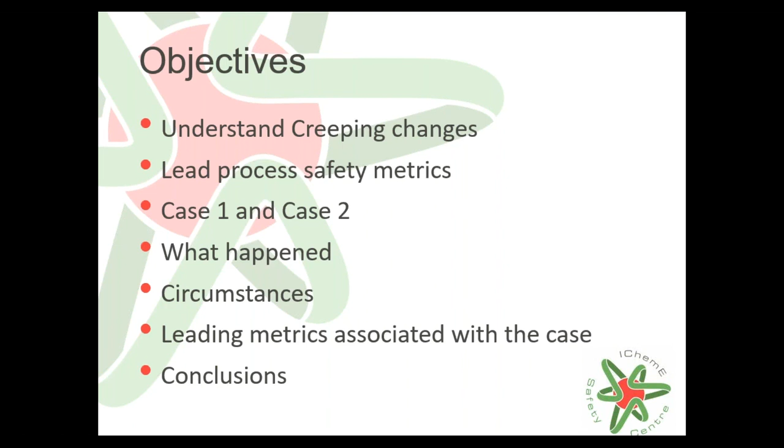Then I will go into the details of what happened, what were the circumstances, underlying causes, or contributing factors to that particular accident, and then I will associate those lead metrics as far as I can with those cases, and we will move to the conclusions. I think most of you who have heard me talking before know I like starting my presentation and building it up based on past events, because I truly believe that sharing old stories and old cases is really important to get to know more about the phenomena we'd like to explore.

Now, about creeping changes, I have a couple of examples, and very briefly I would like to present why I think these are related to the topic. The first one is the case of the Royal Air Force Nimrod military aircraft that suffered a catastrophic mid-air fire whilst on a routine mission over Afghanistan in 2006. This led to the total loss of the aircraft and, unfortunately, the death of all 14 service personnel on board. The direct cause was not enemy fire, but leaking fuel being ignited, apparently by an exposed hot cross-feed pipe.

Now, the deeper causes were quite organizational and managerial. For instance, between 1983 and 2006 — quite a lot of time — a fourfold increase in the number of fuel leaks on this aircraft occurred. That escalation happened gradually over these 23 years. These leaks, individually, were not considered safety critical, one by one. They just thought it was a one-off case, and that's it. They didn't consider them all together as a chain of events.

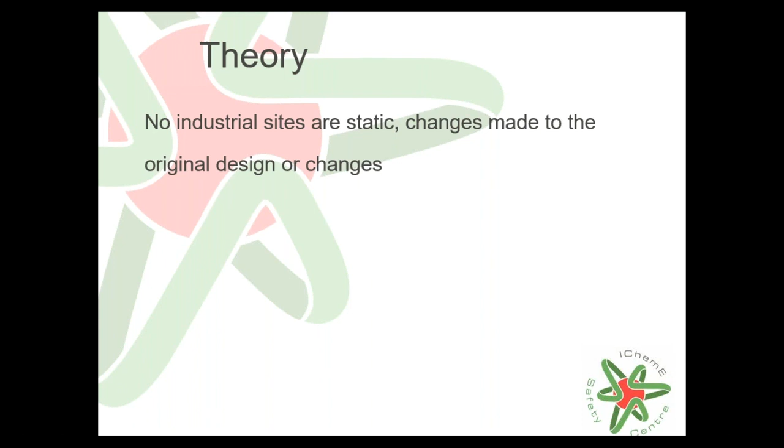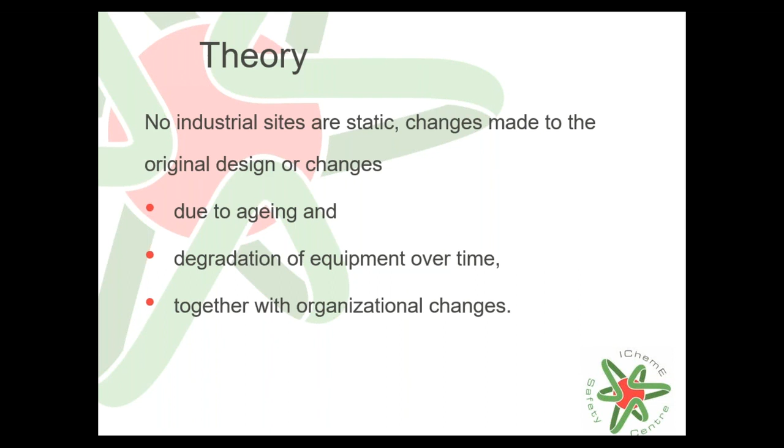Partially because no industrial sites are static. We may tend to forget this, that changes are normal. Changes made to the original design, or changes due to aging. For instance, changes inevitably occurring during degradation of the equipment over time. And there are, as you already mentioned it really nicely, organizational changes that occur in the facility. Plus the category of normalization of deviance - accepting deviations from the norm, either not following the operating procedures or accepting a new behavior as the new norm. So this is the theory behind it.

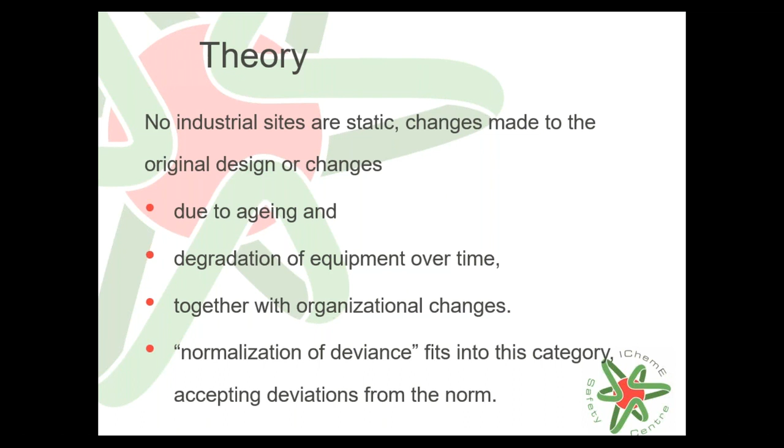But what are the main aspects, the main features of creeping changes? Obviously, everybody can add to this list if you wish. I give you a couple of examples just to trigger potential thoughts. Now, the main aspects, I think, are physical degradation, physical changes in the plant and the equipment, as I already mentioned, organizational changes. A very significant aspect is altering from the original design, new or modified processes introduced into the system. Relating to aging, for instance, that is also an aspect we have to consider - loss of skills and knowledge brought about by staff changes and changes in the culture within the company.

But then, if we know the main characteristics, I have a question. Why is it so difficult to identify these creeping changes? Because I think these changes remain unchecked because, as you already pointed out, they are small, unplanned, gradual, and therefore they may not be noticed or they may be ignored, and they can lead to normalization of deviance. Not all of them, not necessarily, but it can happen.

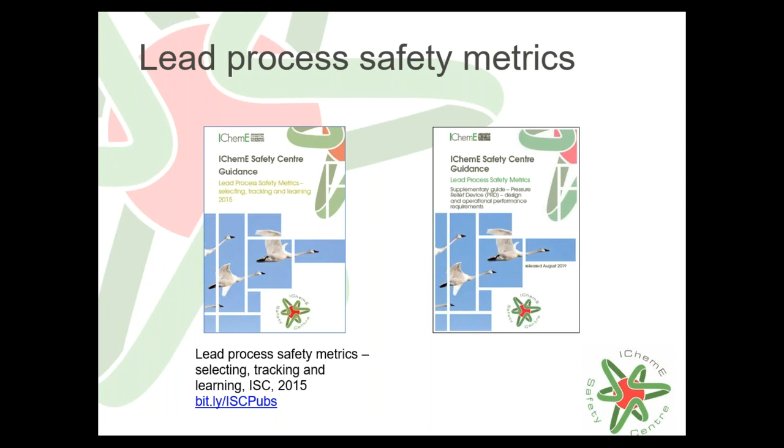I will show you later on how these metrics could be linked to the key findings about those cases, and you will see there is a link so that you can download at any time these guidance documents, both of them, from our website. We have 21 lead process safety metric elements, and these are grouped around the 6 pillars or 6 elements of the IChemE Safety Centre framework. I don't want to spend much time on this, but you will see the importance of these metrics in terms of creeping changes during the presentation.

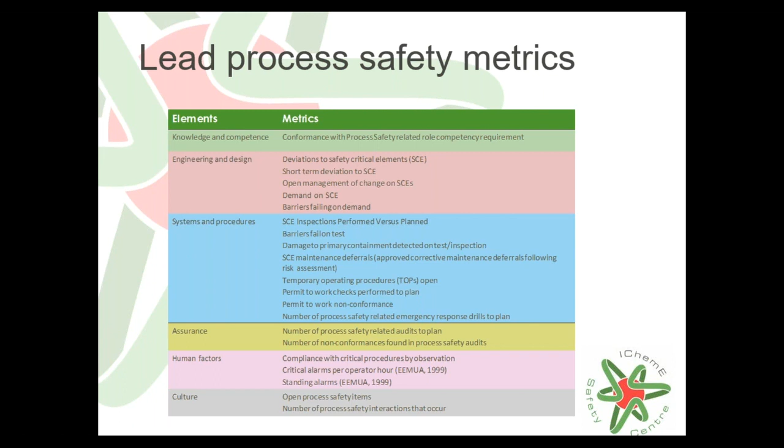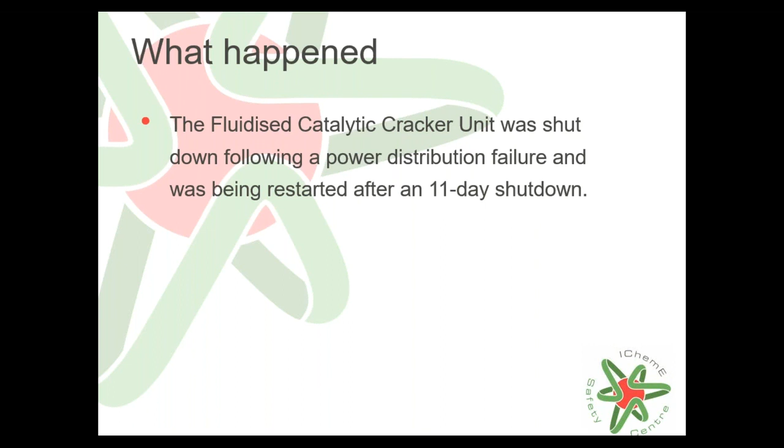Now, the first case occurred in an oil refinery, and I will tell you what happened exactly. The fluidized catalytic cracker unit was shut down after a power distribution failure at the end of May, and was being restarted after an 11-day shutdown in June. During startup, however, a significant leak of hydrocarbons was discovered by the staff, a vapor cloud formed and then ignited, resulting in a serious fire. Luckily, all the workers escaped before the blast happened, and nobody got injured in this incident. So that is the positive side of what happened.

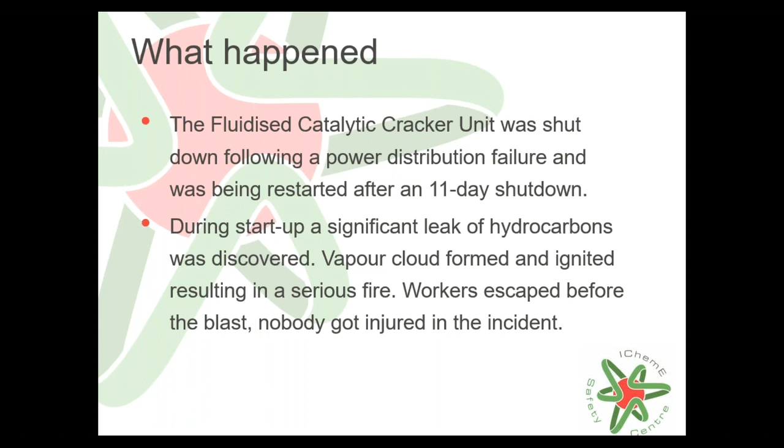But let's see about the circumstances. You will see some of the words underlined, and you may have a slight idea why I indicated them underlined, but I will tell you later. Now, the leak was apparently a result of the failure of a T-piece connection at the base of the debutanizer column, and it found a source of ignition nearby.

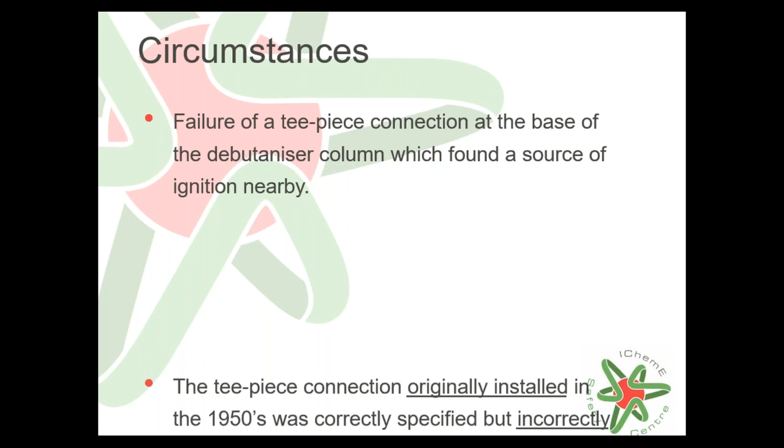This T-piece connection was originally installed in the 1950s. So this is an interesting aspect. If you think about creeping changes, most of the investigation reports don't go back in time that far. However, creeping changes could have originated years and years before the actual big accident occurred. So in this case, this T-piece connection was originally installed in the 1950s. It was correctly specified, however it was incorrectly fitted, and eventually it was hidden by lagging. Plus, there was no subsequent amendment to the plant layout drawings to identify that change.

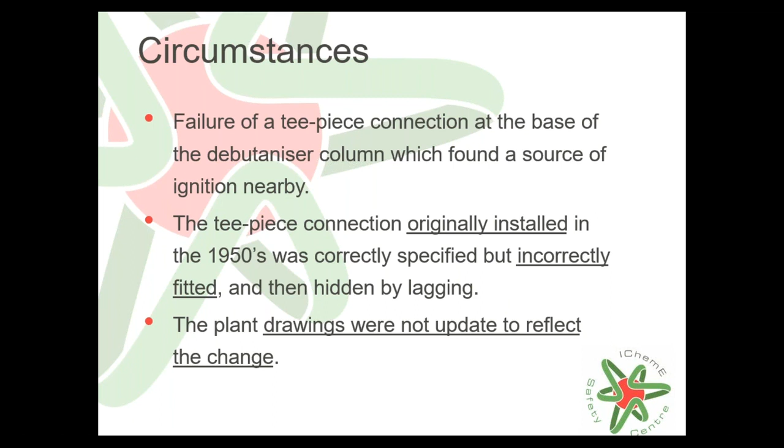And then you can ask me the question, but then how can I know that there was a change? How do I know that there was the lagging, and that you don't have any information on how the T-piece connection was fitted? As I promised, I'll tell you why I underlined these aspects in the circumstances, because those are, I think, elements of creeping changes already. So there was an original installation, but incorrectly fitted and then hidden by lagging. I could have underlined also the lagging factor, and the fact that the drawings were not updated.

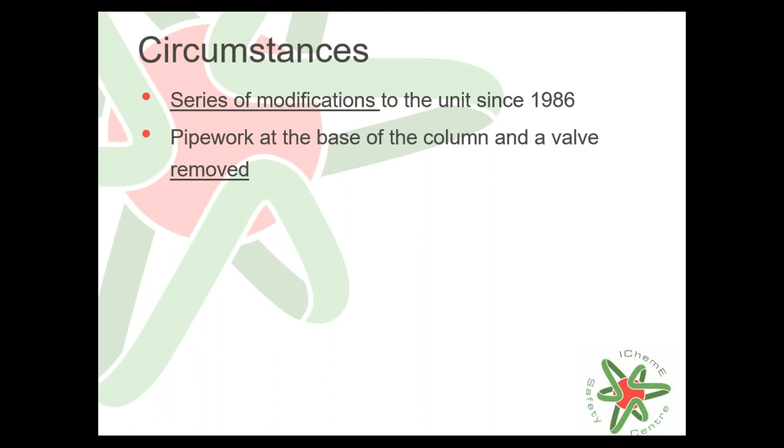What were the others? Since 1986, sections of the unit had been significantly modified, and prior to these modifications in 1986, changes had been made to the pipework at the base of the column, and there was a valve. The valve was removed. That was also an underlying aspect here. That change particularly resulted in inadequate support for the remaining pipework and the T-piece connection.

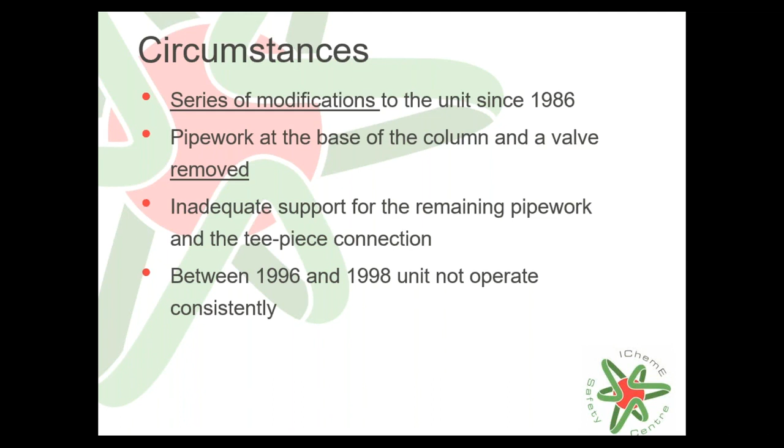Between 1996 and 98, the unit had been experiencing considerable difficulties, and apparently it didn't operate consistently. So for 2 years, there were problems with the operation, and this resulted in an increasing number of startups and shutdown cycles. That could have contributed to subsequent incidents due to cyclic stresses and vibration, as we know, because of the increasing number of startups and shutdowns, which are really dangerous procedures in terms of running parameters being really high, like high temperature and high pressure, so that degradation of equipment could occur during startup, especially rapidly.

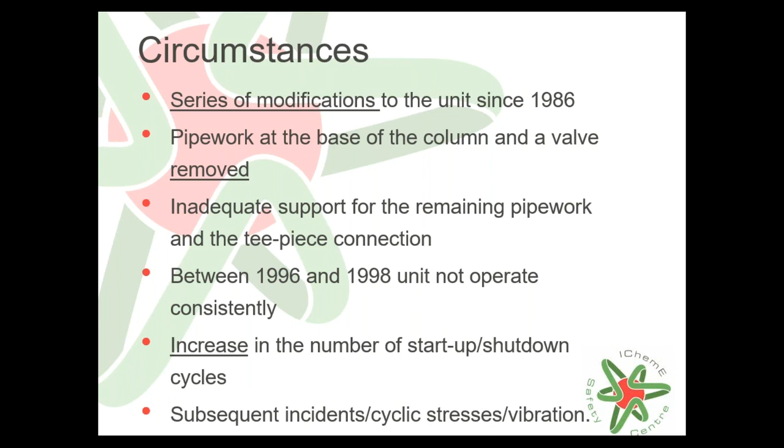I have underlined a couple of examples here as well about the series of modifications. The valve was removed, and then the increasing number of the startup and shutdown cycles. Now, what else happened here?

11 weeks before the incident, out of 19 startup attempts, only 7 were successful. Failure of the T-piece connection pipework was probably caused by a combination of the incorrectly fitted T-piece connection and the inadequately supported pipework. There was also a problem with the safety report, because it didn't reflect the current condition of the unit.

There were incidents before, as we could see in the previous examples of past events, showing a pattern of previous incidents related to vibration of the transfer line, even two years before the explosion. Those incidents apparently were not reported and not investigated.

To make our life a little more difficult, there was another contributing factor to this chain of events: construction on site of a new facility, with most of the work subcontracted out through a contractor of the contractor of the contractor. So there were different layers of contracting out the activity, which wouldn't necessarily be a problem, because this is what operators and plants normally do—you need to contract some work out.

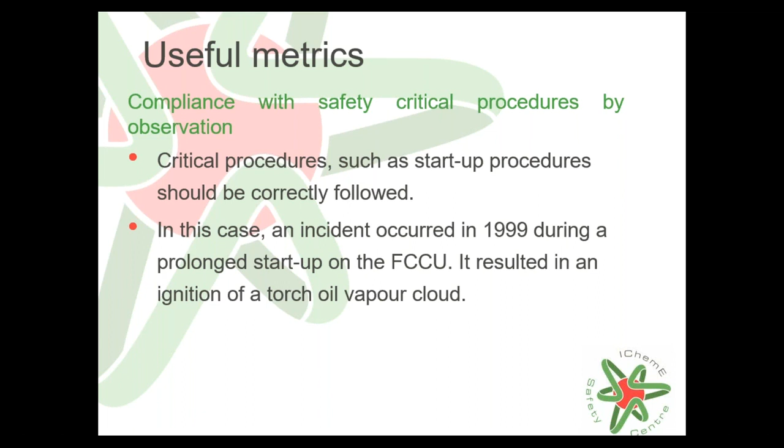Many previous incidents occurred, and there was a prolonged startup on the unit that resulted in the ignition of a torch oil vapor cloud. Why is this important? Because the operating procedures, which were really solid and in place at this plant, were not correctly followed.

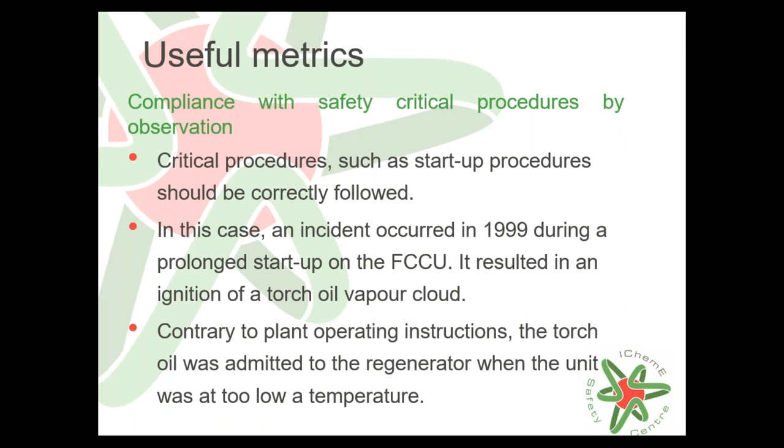Another potential metric could be the open management of change on safety critical elements, underlining the modifications that occurred to the plant over the years—particularly when they removed the valve on the pipework at the base of the column, which originally had supported the pipework and the T-piece connection.

That caused vibration and degradation of the equipment. Another potential lead process safety metric could be the number of non-conformances found in process safety audits.

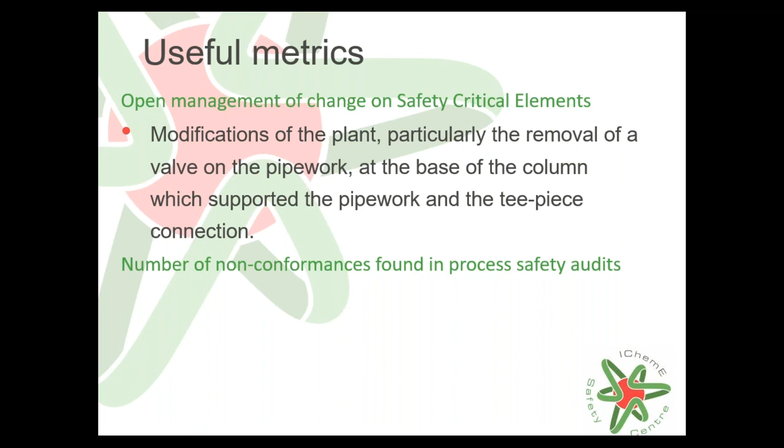As I mentioned, according to the authorities and regulators, the safety report didn't reflect the reality of the condition of the unit, because one or two years prior to the accident, the company's revision concluded that the hardware and software controls in place on the unit were adequate to prevent the occurrence of a major accident.

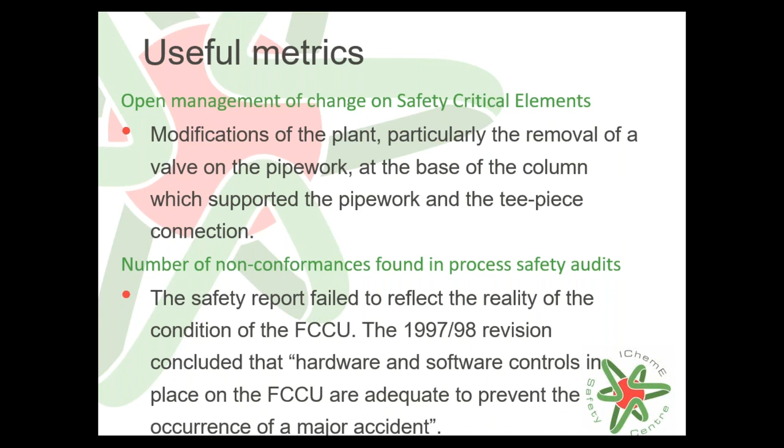So potentially, unfortunately, that was not the case. And there are a couple of metrics you can identify relating to culture, as I mentioned—different incidents occurred prior to the explosion and were not investigated or reported.

Those eventually resulted in organizational changes that went unnoticed. One feature of creeping changes is that there's ignorance—they didn't even realize such events had occurred in the past, so they went unnoticed and were therefore not investigated.

Then the company reviewed the unit once they knew there was a problem, trying to find out what happened and why it didn't operate properly. But unfortunately, those findings were apparently not implemented or communicated properly.

That was case 1 I wanted to present. As I mentioned, the second case will not be related to process safety, and it's a little more difficult to identify those creeping changes. However, it is not impossible.

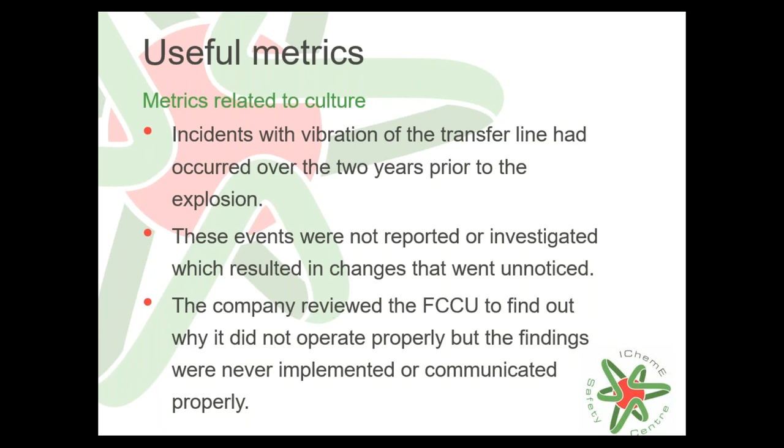I hope that case 1 already demonstrated some of the features and made it a bit clearer what we mean by creeping changes. Yes, you may say it's easier to recognize those changes after the accident happened and after the investigation report is out. I agree, however we can still learn from these points, so that in your own operation you may think about whether you have this kind of change in your plant. That could help prevent such events, or at least some of them. So they can be useful.

I guess many of you are familiar with the case of the Herald of Free Enterprise. This ship was a ro-ro, roll-on roll-off ferry, and this is the case I will show you now, trying to associate the aspects with creeping changes. So what happened?

The Herald of Free Enterprise took the lives of 193 people when it sank off the port of Zeebrugge, Belgium, in 1987. The ferry was leaving the harbor for Dover when water entered the hold and car decks via the open bow door. The Herald of Free Enterprise passed the port at 6:24 p.m. and capsized approximately 4 minutes later. Even though the ferry didn't sink entirely, as it was in shallow water above a sandbank, there was not enough time for passengers and crew to escape, and that's why there was a high death toll.

The bow door, which was left open, was used for loading vehicles. Most ships had divided hulls, but ro-ro ferries tended not to, because of the difficulties of loading cargo and the desire to maximize loads. This particular ferry didn't have bulkheads, which was actually a normal practice on ro-ro ferries at the time. So when water entered the ship, it moved to one side of the deck and the ship became unstable.

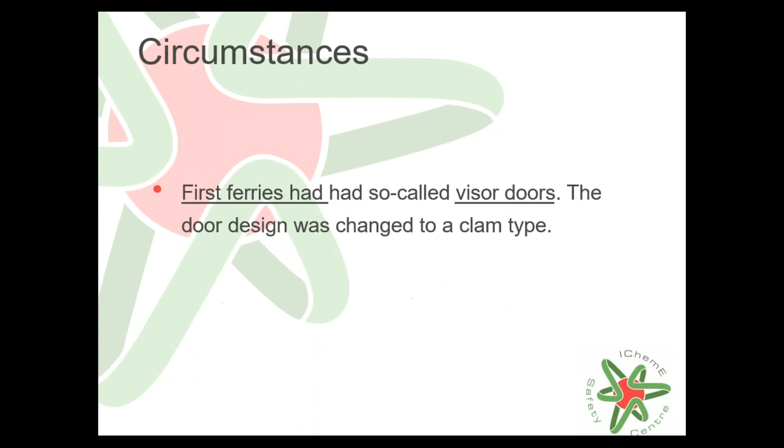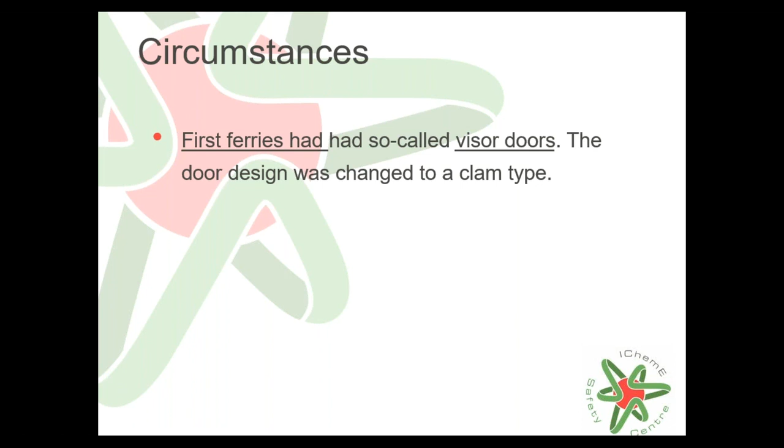The bow doors on this ferry were not visible from the bridge, so the captain couldn't see whether the doors were open or closed. The first ferries, however, had different types of doors called visor doors, which allowed the captain to see the status of those doors from the bridge. But there was a design change where they changed those visor doors to clam type doors, and eventually that resulted in the doors not being visible from the bridge anymore.

Again, the pattern of sailing with open loading doors had occurred previously to this accident. It was a known phenomenon, and from the investigations, captains kept asking management to install indicator lights so they could see if the doors were open or closed. But apparently their requests had been ignored by the management.

Other circumstances included a recent change in ownership. A new company had bought the company just a few months before the accident occurred. Another aspect was that these ships tended to carry excessive numbers of passengers, even 10 to 20% more than the loading limit.

So more passengers were carried than they had life-saving equipment supplied on the ship. There was another interesting aspect, in my opinion, that there were 3 crews and 5 sets of officers on the ship, but they were always different people appointed to do the job based on a random decision, so they were just on the ship for that particular shift. Therefore there was no consistency in the duties - again, ownership, again, leadership of different

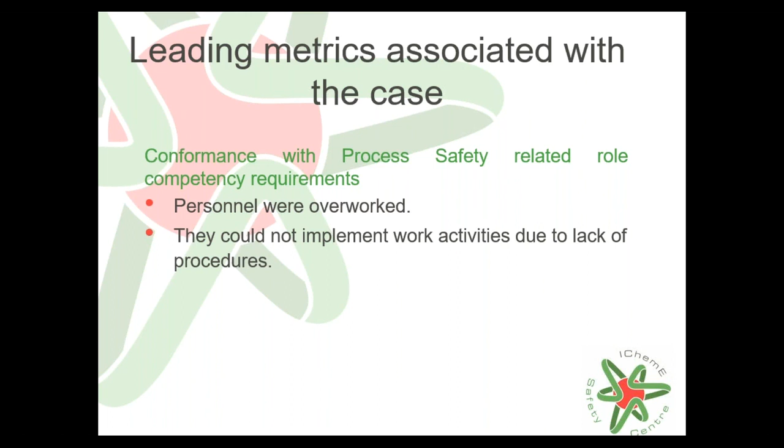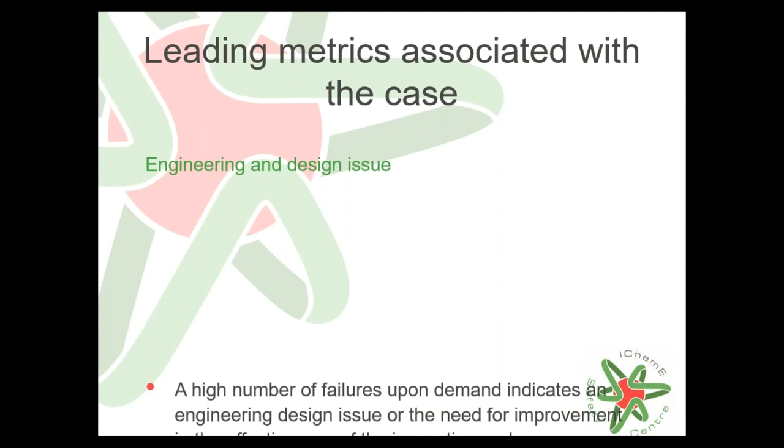What else? If we're talking about engineering and design issues, a high number of failures upon demand indicates a design issue and need for improvement. That is what the metrics say - the metric says.

In this case, the lack of divided hulls is a lack of barrier in place, or was a problem with the design. And as I mentioned, not following through on a change in the design with the divided hulls because of lobbying that expelled it - that was also a problem. That was also a change in the design, as well as obviously the visor doors that were replaced by the clam type doors, and apparently there was no assessment behind it.

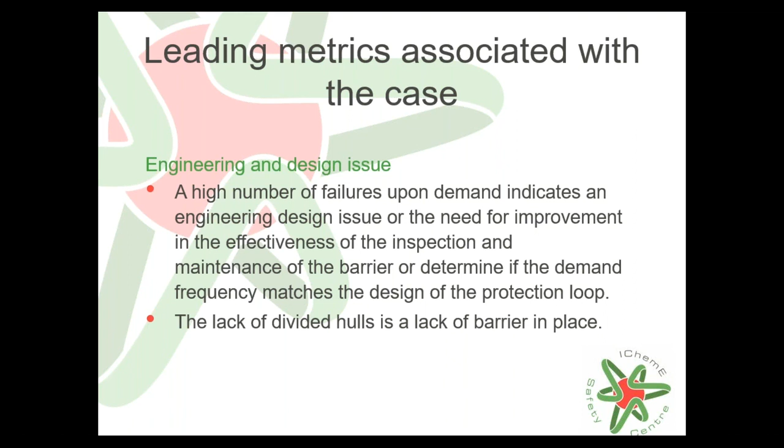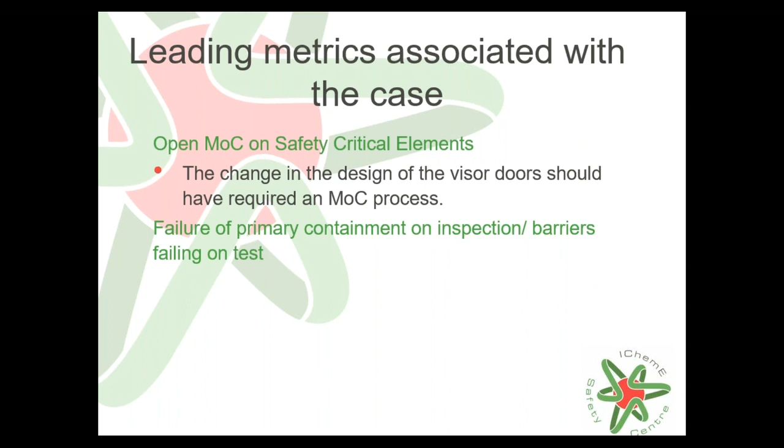Open management of change on safety critical elements could be the change, as I mentioned also here. You can use this metric in the design of the doors - that could have actually required, or should have required, a management of change procedure in place. Failure of primary containment inspection barriers failing on test, in a wide meaning, if you would like to associate some metrics to this case.

So there was this pattern of several occasions when ships had left harbor with their doors open, and captains asked for indicator lights to be installed. So those could be the aspects here.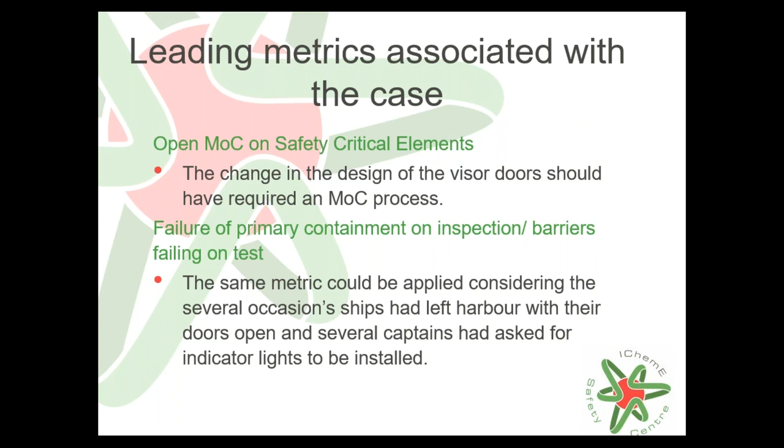And now we arrive at the part where I would like to show you specifically what you can do. First, I would like to give you a brief opportunity to collect your thoughts about the two cases, and if you have any questions about those two cases, please just type them in the question panel, and I will try to answer them maybe later, but still you can think about them.

I hope that these cases highlighted some of the aspects about creeping changes so far, because now we have to talk about the part that I would call 'so what' - so now, what can we do.

The IChemE Safety Centre publishes its safety lore on different topics every 3 months. One of the topics was on creeping changes, where I just demonstrated one of these two cases and identified key learning points from the case. Then, according to the 6 elements of the IChemE Safety Centre framework, I grouped those tips - to the operators, meaning to the management, then to the supervisors and process safety engineers, and then to the operators - what they can do to avoid such occurrences in the future.

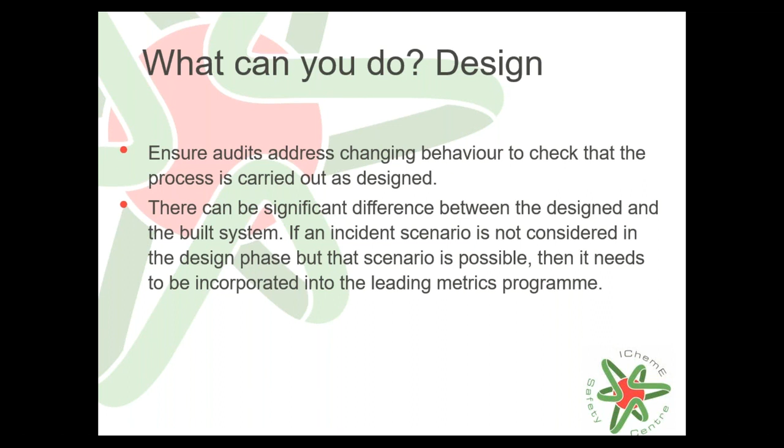I would like to highlight this. I know most of you are familiar with this aspect, but I think it's important to stress it. There can be a significant difference between how the system was originally designed, especially with old facilities, where the original design has changed over time. And in case there is an incident scenario that was not considered in the original design phase, but that scenario is possible, then it needs to be incorporated into the leading metrics program.

That's why I showed you the metrics. How to detect signs of change, as we've seen, is really difficult. So if you implement a system and structured process for identifying those changes, you can detect how the process should operate and what the current status is. So continuously monitor your system, how it behaves, what changes, what upsets to the system occur over time. That gives you some idea.

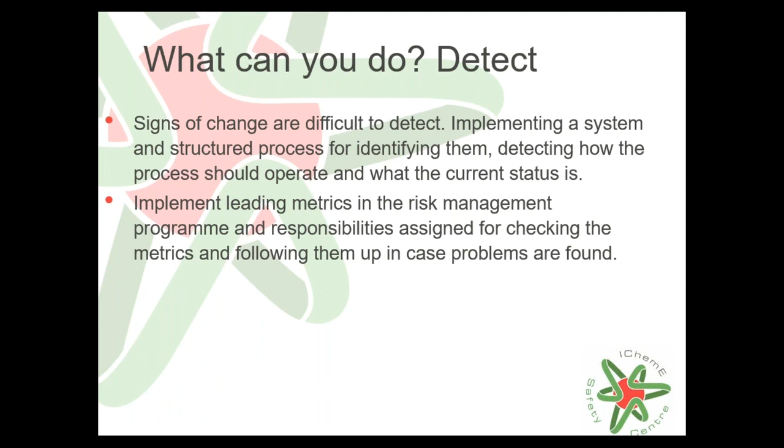If you implement leading metrics in the risk management program with clear responsibilities, clear roles, and competency, that helps you so that if problems occur, there should be an action plan to ensure these leading metrics exist, that they are actually useful, and that they indicate when and how they will be checked and have an action associated with them. It's not enough just to have leading metrics; you have to understand their application, their use, and whether they can cover a particular aspect. If not, you can identify more of them, but always feed it back to the system and understand why they are there and whether they are operating well.

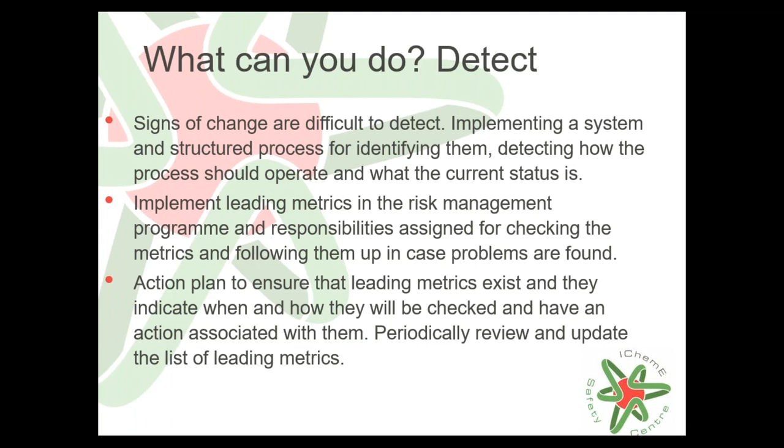So you need to periodically review those leading metrics and update the list in case of a change, or in case it needs to be updated.

In terms of incidents, even small changes, even near misses, everything should be investigated, and not only focusing on proximal events, as I showed you in the example of the oil refinery from the 1950s we are talking about.

So in case of an incident occurring, you can and should check if the leading metrics selected for that particular unit are in place, whether they failed, and why they failed, so you can identify the problem to prevent future incidents and take actions if necessary.

As I mentioned, near misses are really good signals that something is going wrong within the system. You can check those near misses and get information about those accumulating causes that could help identify problems.

What about cost? Cost is a really sensitive topic, I know, but what a manager can do is make sure that cost cuts do not impact safety and do not threaten plant integrity. Easier said than done, I know, but it's a significant aspect we've seen from previous cases.

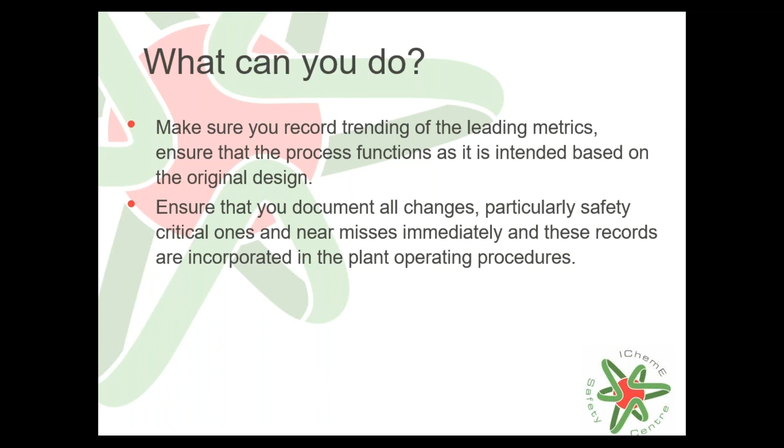If you experience changes, make sure that you document those changes, write them down, make notes of those changes, especially the safety critical ones, near misses, immediately after they occur, so that you have records you can find later when you need to analyze those cases.

As we could see in one of the cases, if you have layout drawings of your plant or your unit, make sure those are up to date, and you follow up and record all the changes that occurred on the layout over the years.

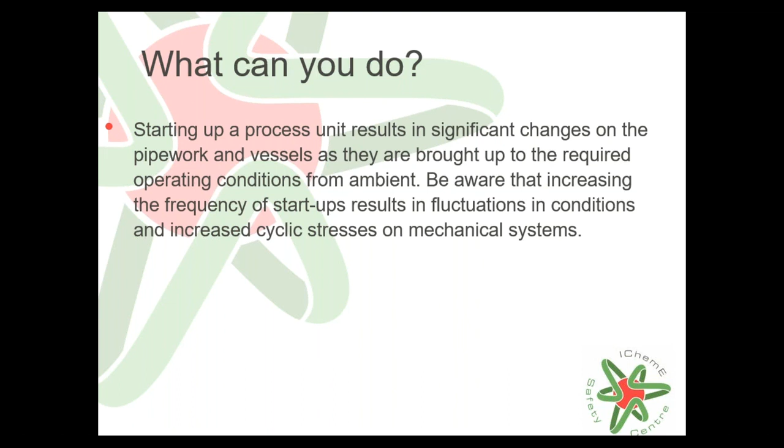What else can you do? When you have a startup going on, it results in significant changes to the unit, and you should be aware that increasing the frequency of startups results in fluctuations in conditions and increased cyclic stresses on mechanical systems.

Also make sure you pay attention to signs of normalization of deviance, where operators, contract workers, employees might alter from the original procedures for some reasons. They may have their reasonings - it happens - so make sure you pay attention to those aspects, and ensure safe operation is really in place.

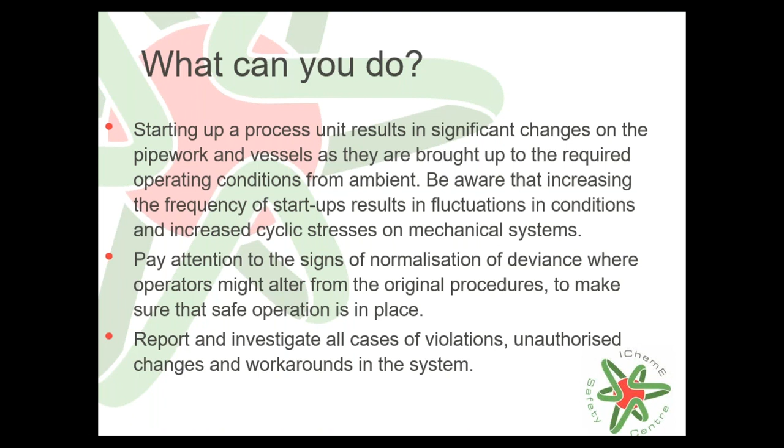Report and investigate all cases of violations if they occur, and unauthorized changes and workarounds in the system. So this is for process safety engineers and supervisors. But what about you as an operator or contract worker, for instance?

This is a topic that requires more attention from the management. That's why the list for the managers is really, really long compared to what we have as tips to the operators. So what can you do?

Make sure that you follow the operating, maintenance, and emergency procedures, and do not deviate from them. That is a really critical aspect that I would like to highlight for the operators.

In case you see something, report any damage or irregular event immediately to the supervisor. That's why supervisors are there, so that operators can immediately turn to them and report if they experience or observe something that is not correct, or that there is potential for a smaller or bigger incident to occur.

This is what we always highlight in many forums: if an operator observes that procedures cannot be followed because they are really complex, or the wording is really difficult to understand, or it doesn't reflect completely on the particular procedure - because these operators know how to do their job daily, so they are really familiar with the system, the unit, the particular part of the plant they work on.

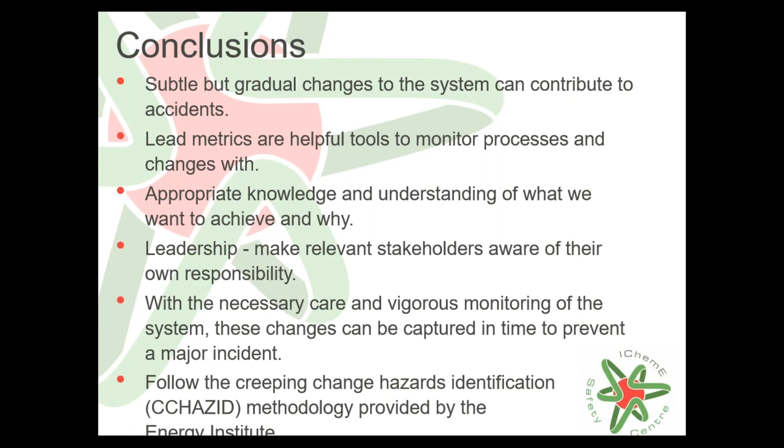What I would like to highlight is there is a very good publication about the details of hazard identification of creeping changes that was published, if I remember correctly, around 2010 by the Energy Institute. You see it's not a new topic, but there is still a good guidance document out there you can get from the Energy Institute on creeping changes hazard identification. In this period of time, I could only give you these examples and a brief overview about creeping changes. If you want to go into the details, you can follow our literature or check that publication by the Energy Institute or other sources, but honestly speaking, there's not much literature out there on this specific topic.

So I would like to thank you for your kind attention and for actively participating with questions. Now I'll try to see the question panel. If you have any questions, please ask. Also, you have the opportunity later on to send your questions to the safety center at icheme.org email address so that I can answer them later. So this was the 1 hour webinar on learning from creeping changes.

Okay, there is a question about whether creeping changes are in line with elements of risk-based PSM by CCPS. Yeah, could be, yes. I think it's a positive outcome.